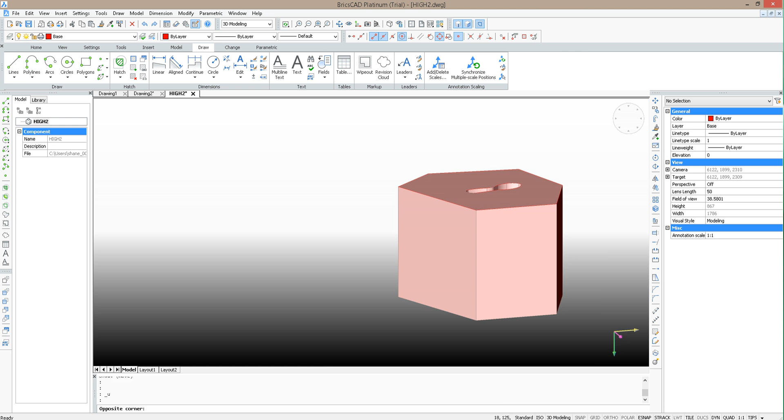Okay, so we're looking at this and wanted to make sure that it actually was covering our base. So see how it wasn't really covering it there?

So we just click the edge and we extrude it up. That didn't work, didn't like that.

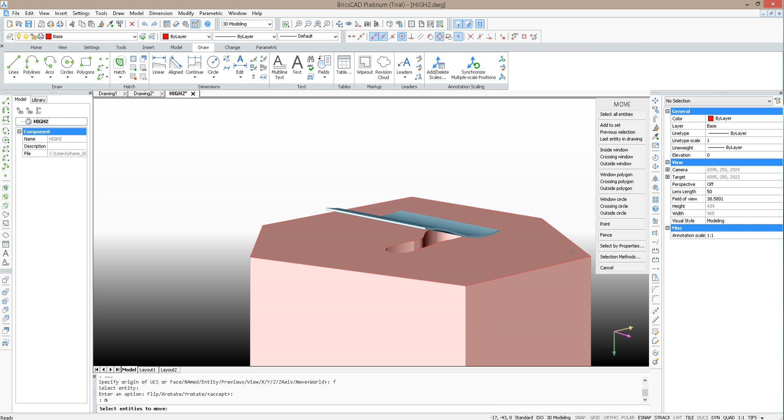UCS, F for face, and we select the edge. That's our working plane. Now when we move it, M for move, we'll move up. But see how it's moving all in random directions like that?

I'm going to turn ortho on. That snaps it, so it'll only move in the direction I want it to move, which is great.

So you see there was, that level there was the level that we actually originally drew our cookie cutter thing on. Cool. Alright, so I'm going to turn that on, everything's on.

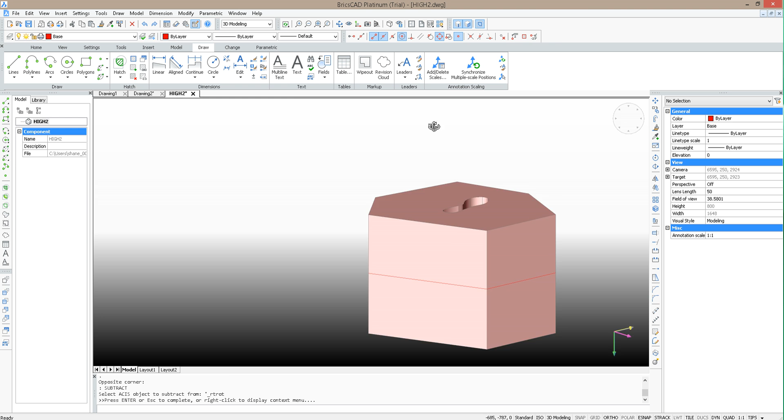So now we use the subtract command. Alright, so what do we want to subtract from? We want to subtract from that, we want to subtract this, and it's all done. Look at that. So we've now got our heel, which is great.

Okay, so it's a reasonably comfortable looking heel.

So now I'm going to turn the base off, and I'm going to turn the box back on. And, sorry, I didn't turn the base off because it was my working layer, so I'll make that my working plane, and I'll turn the base off.

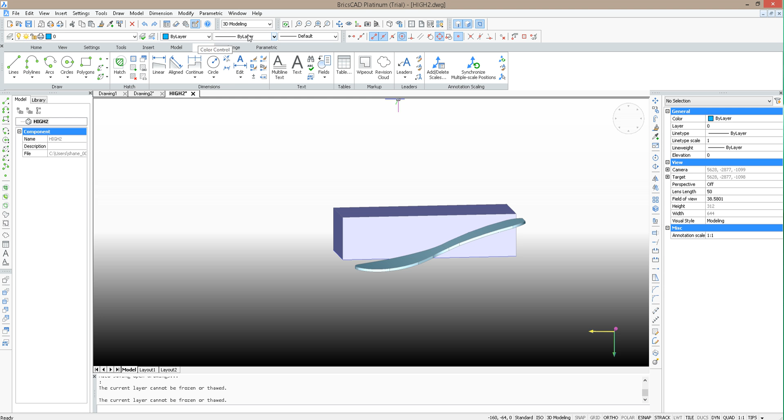Alright, so now I want to draw the actual stiletto part of the heel. I think that's what you call it. Sorry if I get that wrong. And so I need to select my working plane.

UCS, F for face, and I'm going to select the bottom of the box. That's my working plane. Cool.

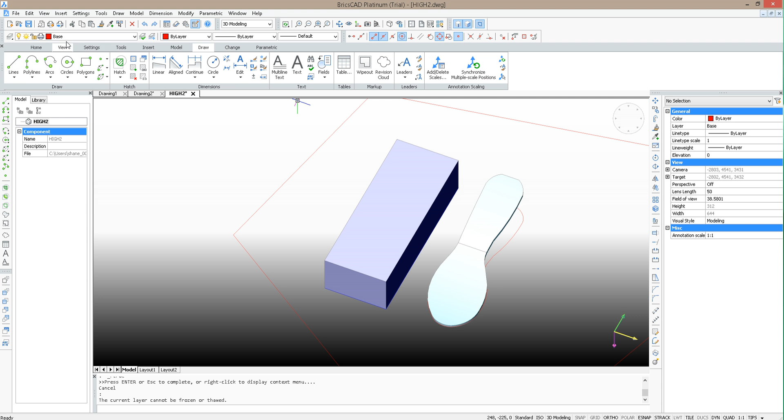Alright, now what I'm going to do is I'm going to turn the base back on. And I'm actually going to make the base my working layer, and I'm going to turn that off.

Okay, now we know that we want to actually draw our heel here on the bottom. So I click circle.

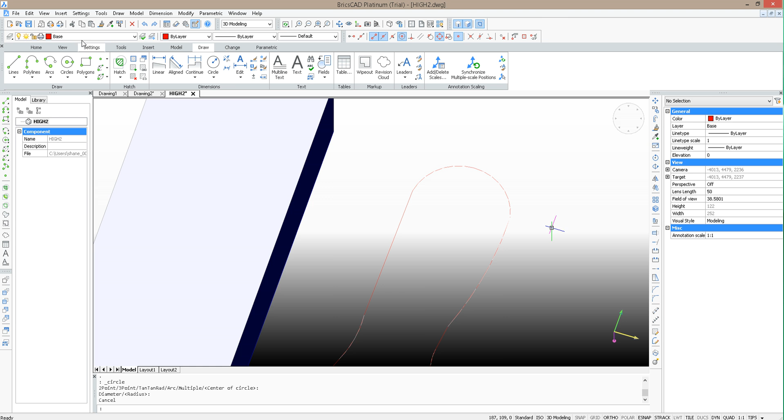Ah, it's white. That's why I can't see it. I'm going to go back to 2D drafting. Hopefully that will make my life a bit easier. Okay, I can see that a bit better now.

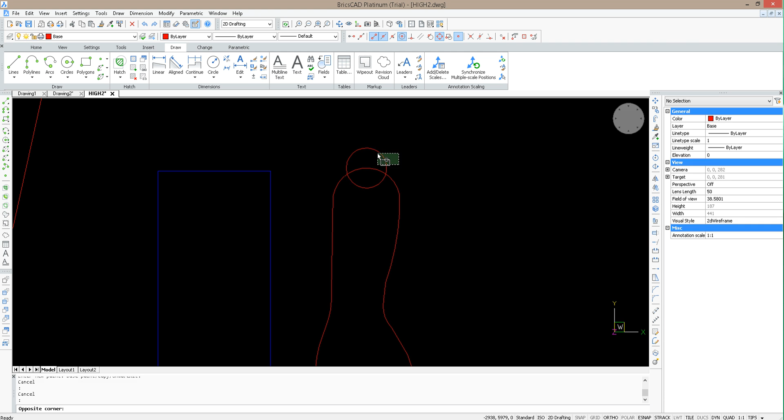Okay, now that's not really where we want it. We sort of want it on the bottom. So I'm going to click there, whoa, click there, and I'm going to move it. M for move. Snap it so that the end is there.

Alright, now how high did we make our heel? Does anyone remember? Yeah, well, we made it 5 centimeters high. So, sort of drawn that there.

We can extrude that. No, it's not wanting to give us the extrude options. So we can go back to 3D modeling, I guess.

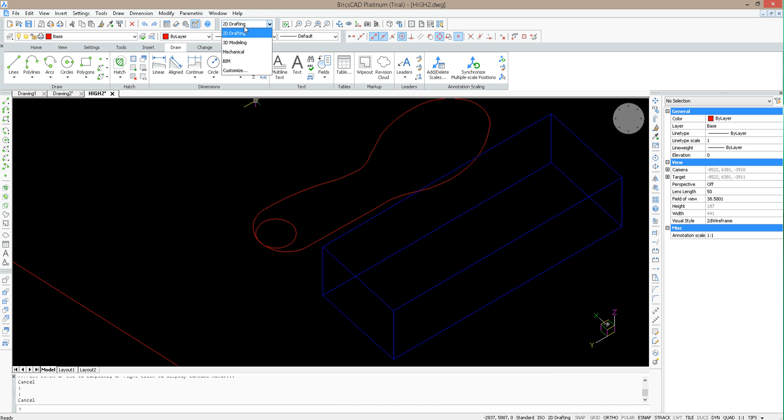Mine always comes up with that error. It's because of some other stuff I've been doing. So we want to make it 50, because that's how high we originally made it.

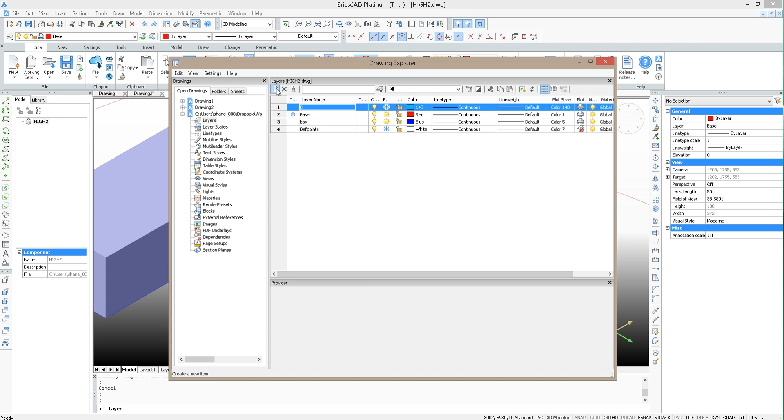And remember how last week we learned about editing faces? So what I'm going to do is, this guy here is on the same layer as base. I'm going to make a new layer, calling it heel, and I'm going to make that green.

Okay. I'm going to select that. I'm going to select this first. Put that on heel.

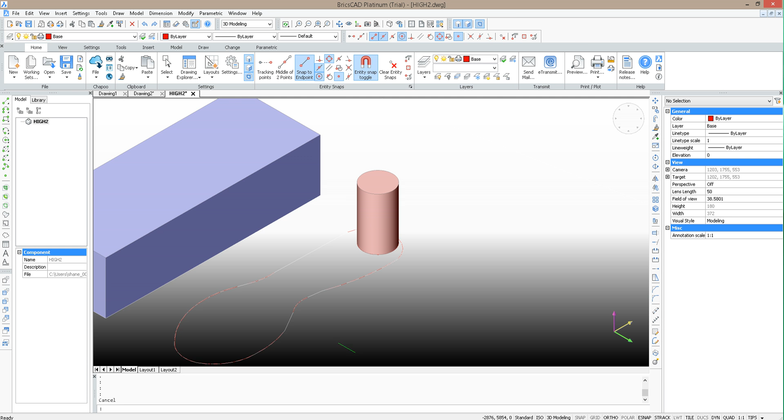It's being a bit difficult. Go back to 2D drafting. Hopefully that'll fix it. Sorry about that. Put that on.

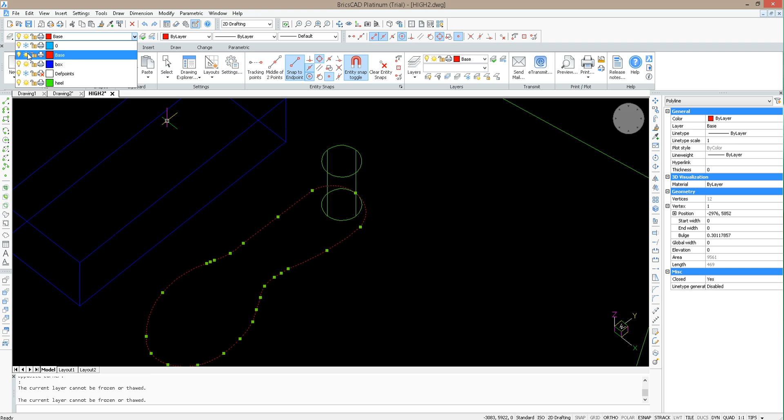Put that on heel and maybe turn that off. Heel, make it the working one, and turn base off. Okay, so now I've got that.

Okay, and we'll just change our view to modeling so we can actually see what we're doing. Alright, now there was a command called solid edit,

and we're going to edit the body, and no, it's not the body, it's the face, sorry, and we're going to taper it. So remember we did that the week before?

We're going to taper that face, and want to go from there down to there, and I think we said like 6 degrees was good, didn't we? Probably not enough.

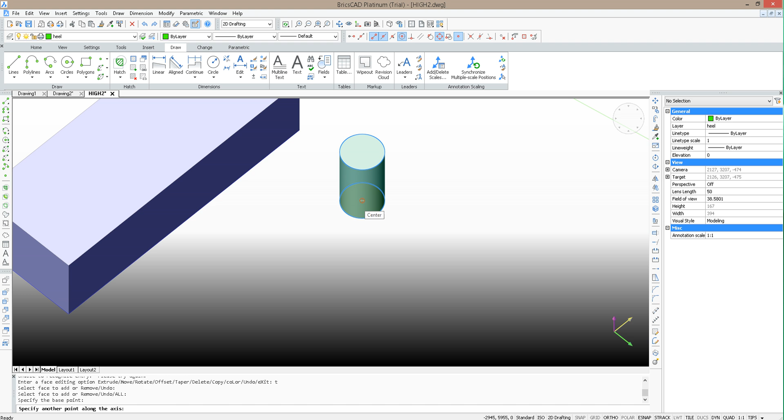So we'll try that again. F for face, T for taper. I tapped F. Select the face, that face, and there down to there, and I'm going to go 11.

There we go. Yeah, I'm pretty happy with that. I think it's in the right spot. I mean, maybe it's a bit ugly.

I'm not sure. Now what we're going to do is we're going to change the working plane to the top of that heel. So UCS, F for face, click the top.

And remember how we drew our thing last time? Well, this time we're going to use a polyline. And press F3 and turn ortho off. That way you can select where you're going to slice.

I reckon about there. It's like making a cookie cutter. You probably remember we did it last time.

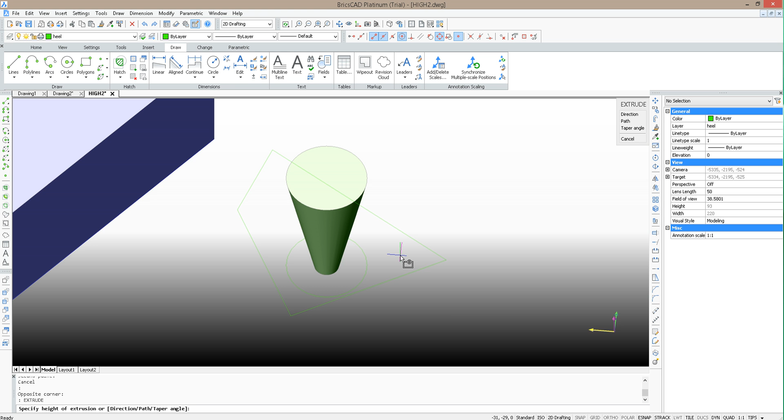Extrude that. Height of extrusion, let's go -300. Okay, so it's made a massive big thing that we don't really want.

Subtract. I want to subtract from that. I want to subtract that. Okay, now we have our heel that's going all the way down like we wanted it.

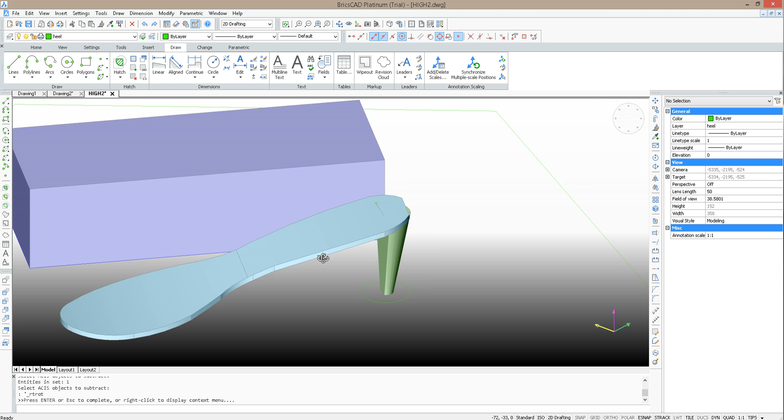Okay, so now what we're going to do is turn this guy back on. So now we've got that there like we wanted it, but there's a little bit of it jutting out here, and also sort of not really marrying up there very well. You can just hover over there, and we can go back to 3D modeling.

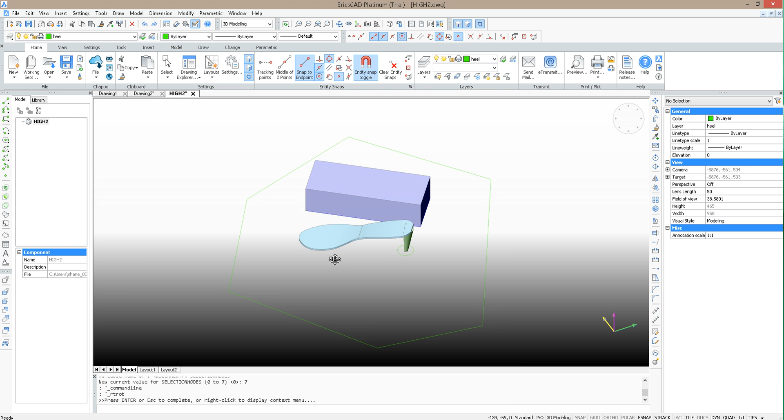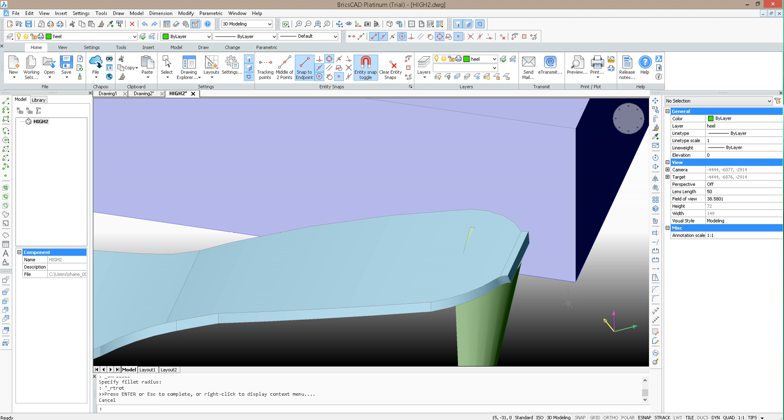It's a bit weird, isn't it? You do something like this. If you want, I don't know if that looks great. I actually don't like that very much. I'm going to Control Z that, and...

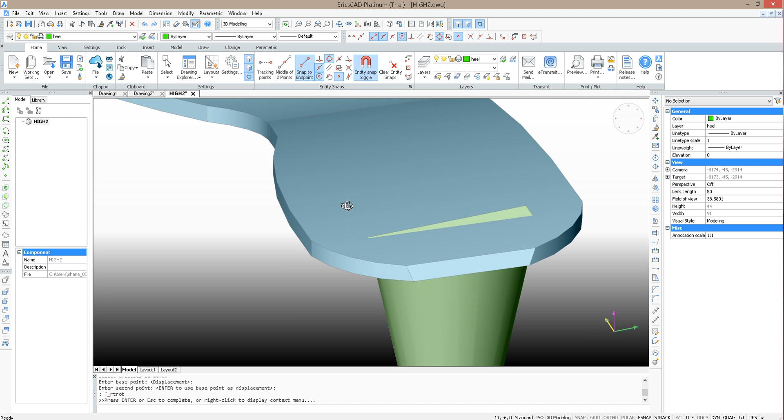Change my working plane to that again, and I'm actually going to move that. Okay, I moved it back a little bit. Okay, but still that doesn't look real good because it's sort of coming through.

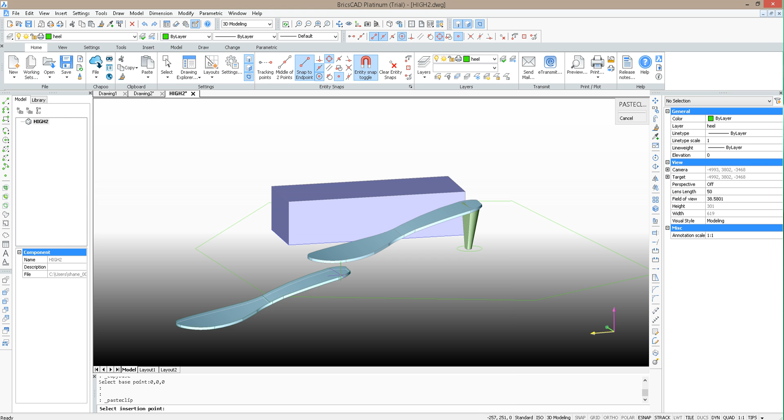So what you do is you select that, you use Shift Control C, and it says select base point. Type 0, 0, 0, and it selects your base point, and then go Control V, and now you're holding it, so it's going to paste it. So you go 0, 0, 0, and it copies it back in exactly the same spot.

Now the reason we're doing that is because we're actually going to subtract. We're going to use the subtract command. Okay?

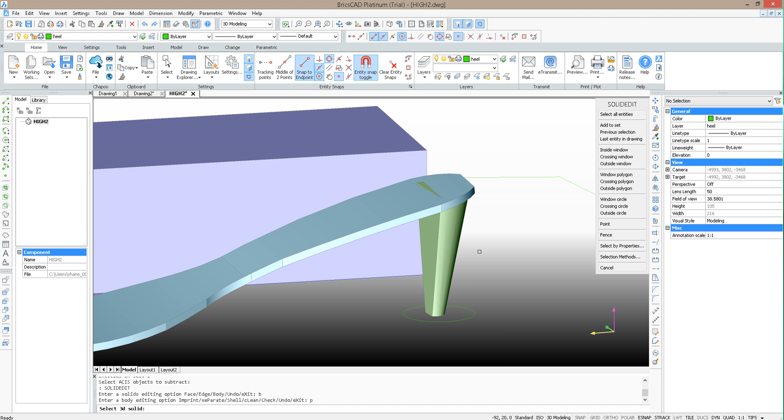So object to subtract from this one, object to subtract this one. Okay, so it actually deleted that first object, but now what's happened is it's actually made this into two separate things. So when we go solid edit and select the solid to edit, and we go B for body, and then we go P for separate, and we select this solid, and now it's separated these into two separate solids.

So when I click that, I can just delete that. You know what I mean? So now that's part of this. Okay? So now our heel is part of that.

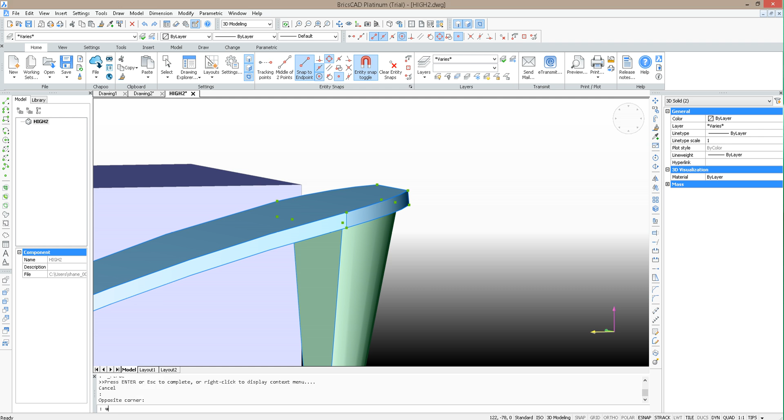Now we might want to do some stuff in there, like some chamfering and stuff. So what we do now is we select both of these, we type union. Okay? Now it's joined those into one thing now. Okay, which is kind of cool.

So now we can start putting our own artistic touch on this heel. So I can hover over to there and I can put, let's go 7, see what it does. There we go. It's giving me a nice arc in there.

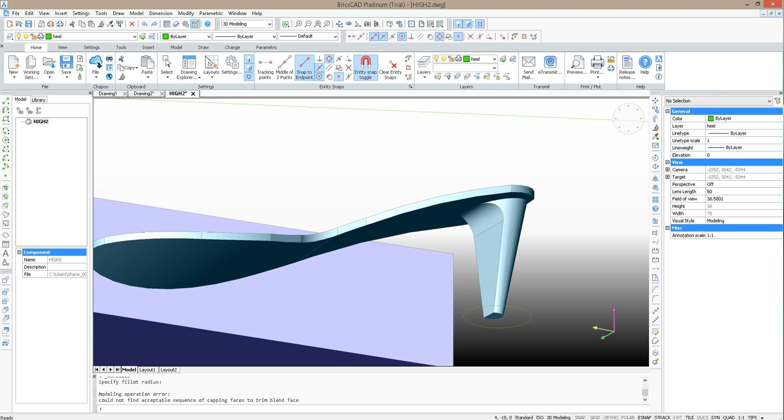Maybe I want something bigger than that. Let me go 14. Yep, it says that was too big. Let me go 10. That was also too big. Let me go 8. Alright, it doesn't mind that.

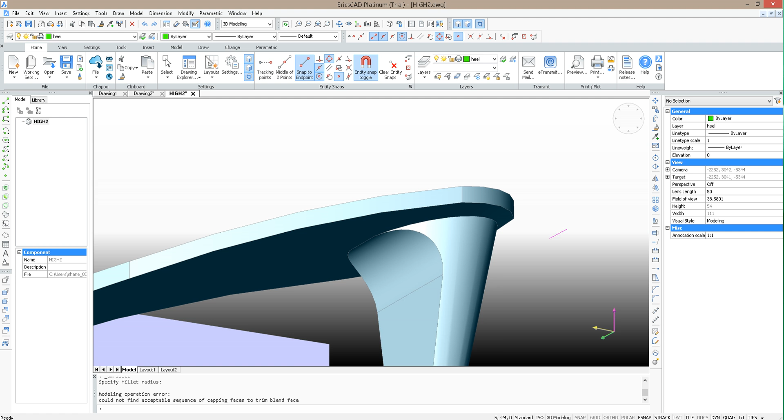So now it's given me a nice fillet there, and I can do another fillet in there as well. So I select that guy there, and I can do like 3 maybe. Didn't like that.

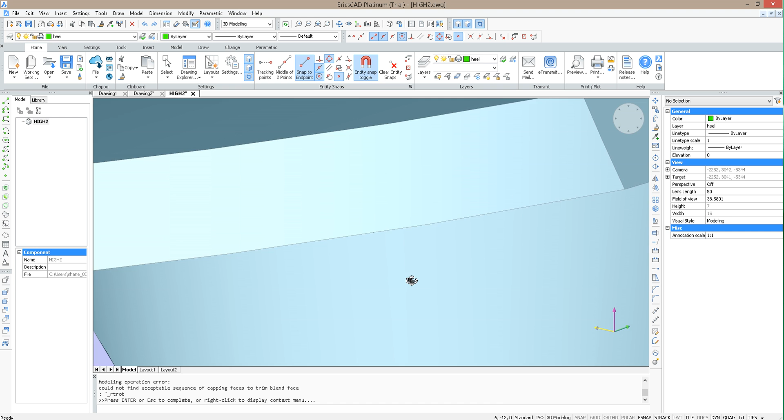Ah, that's why. Because of that there. So it doesn't want to let me fillet that at all because of that. Which I guess is okay. Because you see how it's intersecting directly with that, so it won't let me do the fillet there.

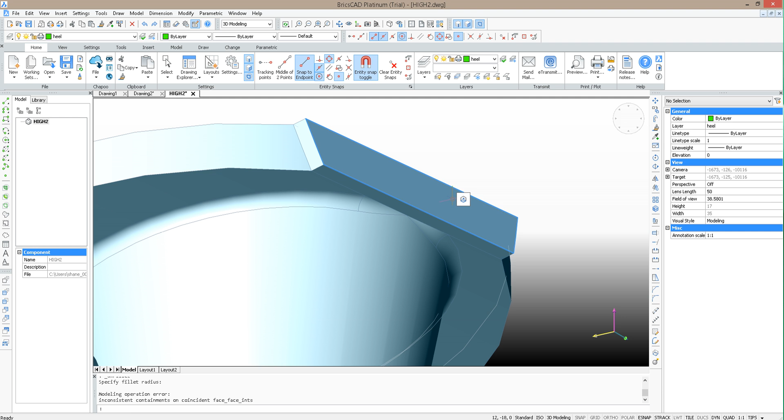So if I pulled that out, say 1 mil, oh, that looks a bit weird, then it will let me fillet. Go 1. See what I mean? Okay, and then I can push that back in. Okay, now it's done it.

So now we've got our heel, okay, and we've sort of put some cool finishes on it. I mean, there's other things we can do. We can select these guys here and we can chamfer that, say with a 2 mil.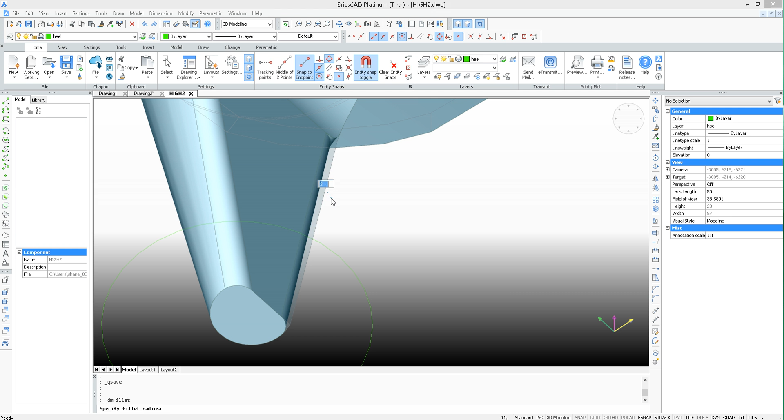And just save my work. Chamfer that. Put 2 mil there. Yeah. Like that.

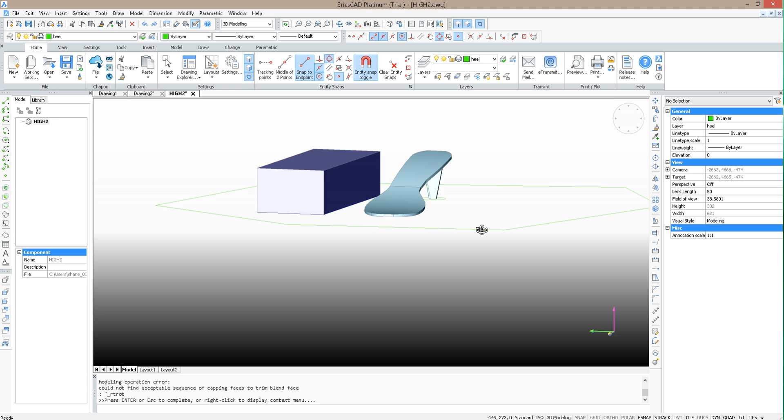We've got to play with that some more. But now we sort of have our basic structure of our heel, you know. So now what do we have to do? Well, we have our little section here to do.

So we're just going to do that quickly. And we can play with that in Meshmixer once we get to that point.

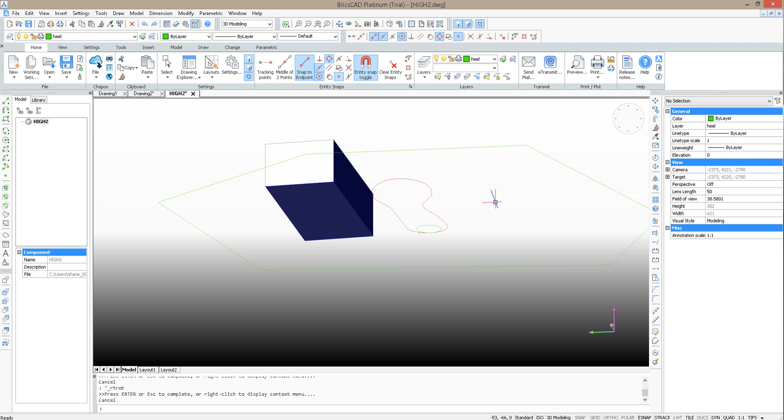So we can turn that off if we want, and we can turn our base back on, and we can change our working plane back to this one. Okay, so that's our working plane again. I'm getting sick of this external box here, so I'm going to get rid of that.

So whereabouts do we want our thing to be? The thing where our foot goes through on the heel. Now I think a good place for it would actually be around about here.

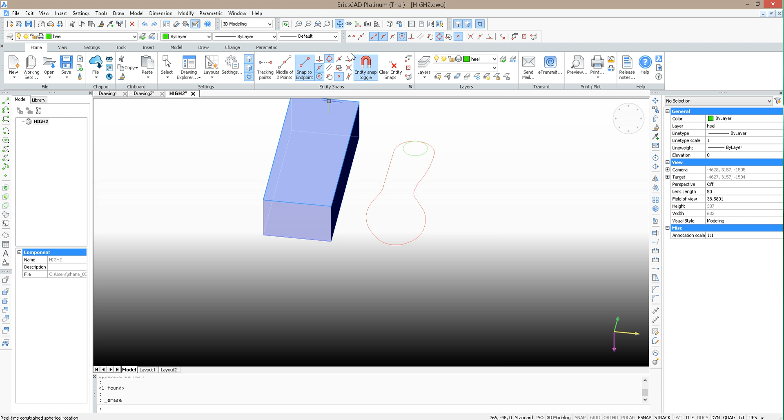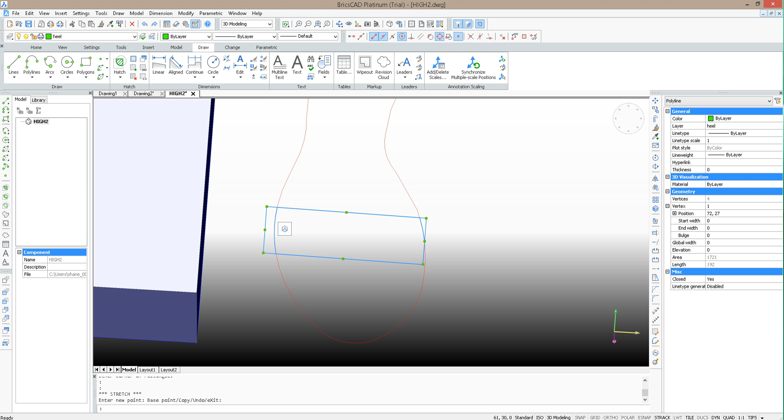So I'm going to draw a polygon. And I'm going to turn off the snap function. So that's probably an okay spot for it. Now, probably want it like that, and probably like that.

That's pretty good, and we probably want it to match what we're doing. So I'm going to change this and put it on the base layer, and change everything to base.

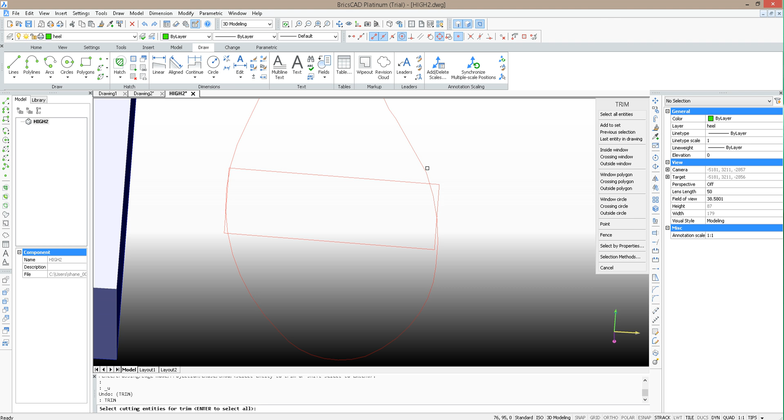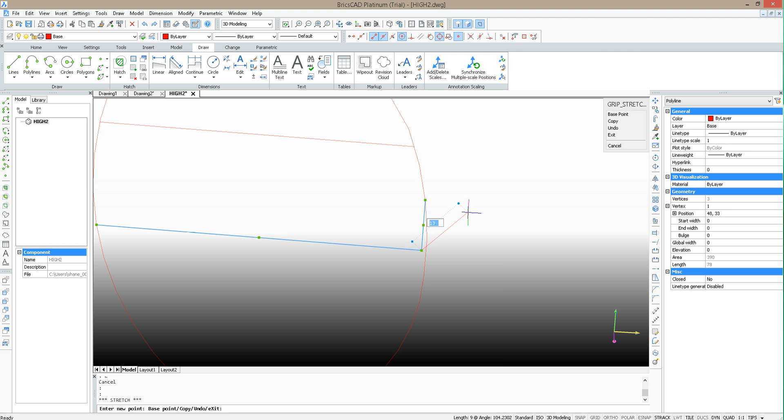Now we're going to cheat a little bit and use the trim command. Let's trim that away, and trim that away, and trim that away. So we just delete that guy, and maybe this guy here. I'm just going to explode that whole thing.

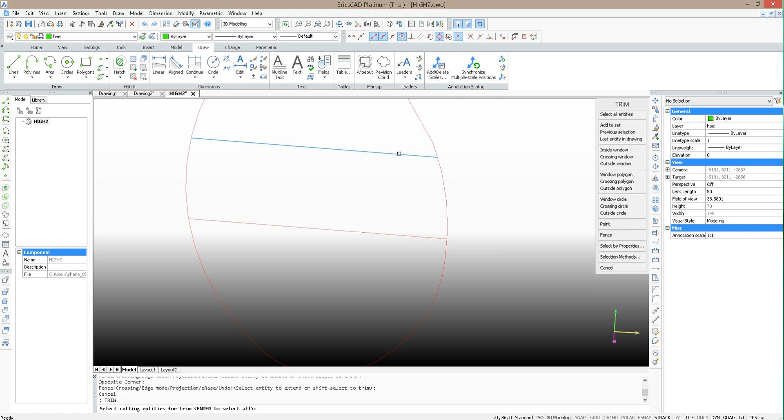Okay, get rid of that. Use the extend command, click that and click that. Now I'm going to use the trim command again. I'm going to click that and that, press enter, and trim this so that it's now the shape that we want. I'm going to select the whole thing and join it.

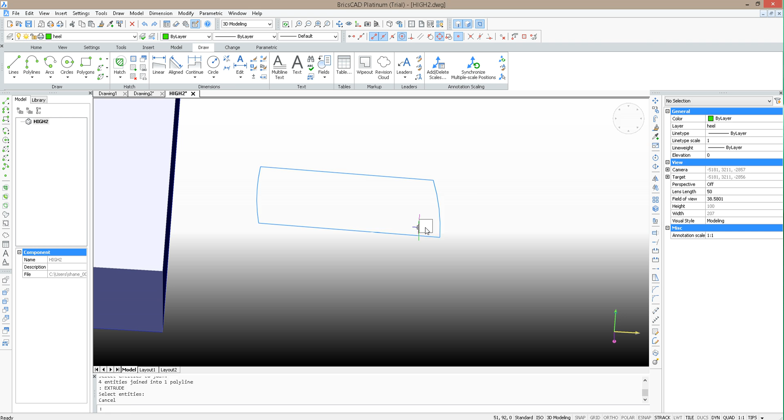Now we probably want to extrude that. Just hover over it, let's bring it up. Let's say 35. Okay, so we've got that there.

Now we can turn this back on. So now we've got like a weird thing that's sitting in our shoe, and you're not sure if we like it. I don't really like it very much. So we can have a look at it and say, oh, is that a good place for the strap or not? I think it's alright.

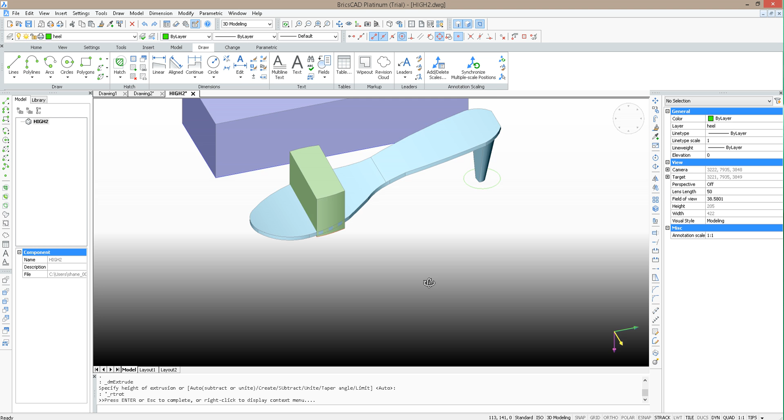Maybe back a little bit, but that's something you guys can play with if you want. And I think it's probably a little bit high. I'm going to bring it down 5 mil. Okay, and then we can put some stuff on it.

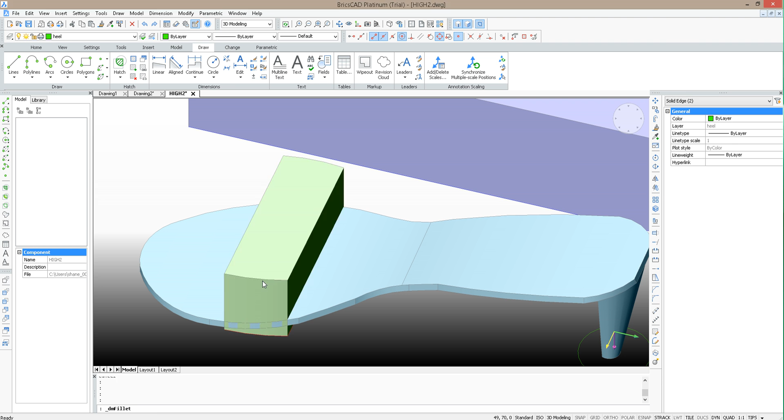So I would click both sides, click that one, and then do the fillet. And see how it's doing both at the same time? I think that looks alright. What do you think? I think so.

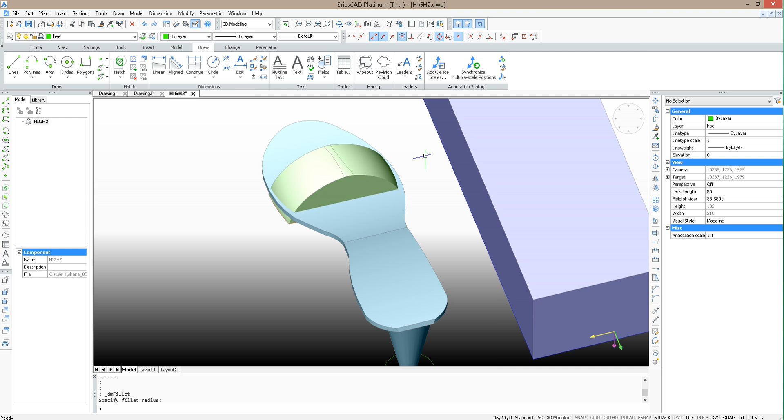Okay, so now we look at that and we think, oh, okay, well that probably needs a little bit of something. That's alright, let's fix that. Now we've got this funny little bit jutting out the bottom. Now we do the same thing that we did last time to sort that out.

So we go Shift Control C. Oh no, select that first. Sorry, first select it. Shift Control C, 0, 0, 0. Enter. And then Control V, and we go 0, 0, 0. And it puts it in the same spot.

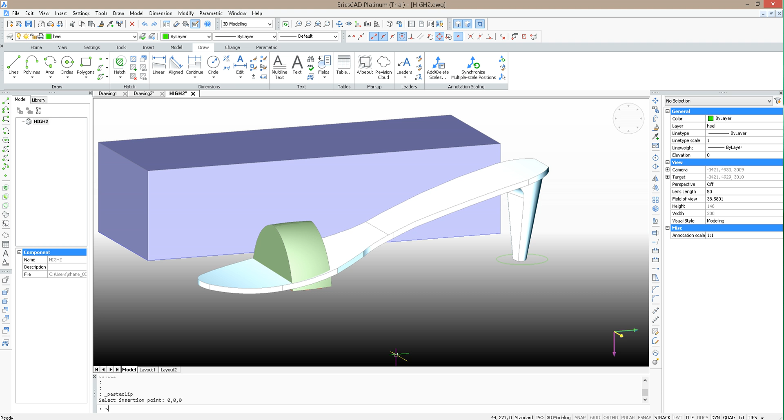And we go subtract. Object to subtract from is that. Object to... no, that's not right. Object to subtract from is that, object to subtract is that. Cool, so that's done it.

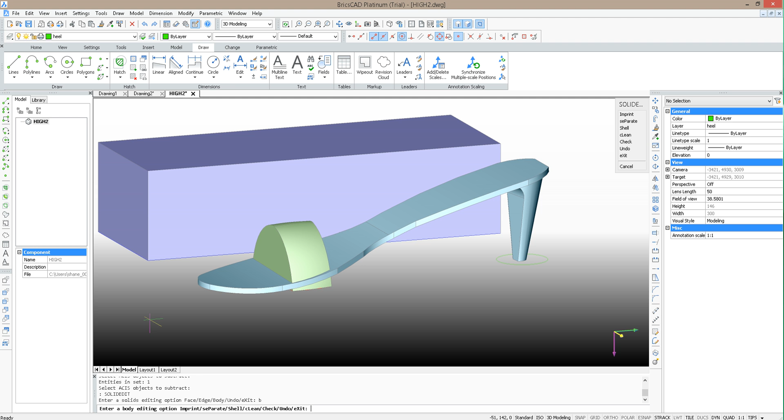Now we go solid edit, B for body, P for separate, and we click this guy. So now that is gone because it was a separate object. Okay, that's cool, so now we have that, but it hasn't got a hole in it. So we need to put a hole in it so that we can actually put our foot through.

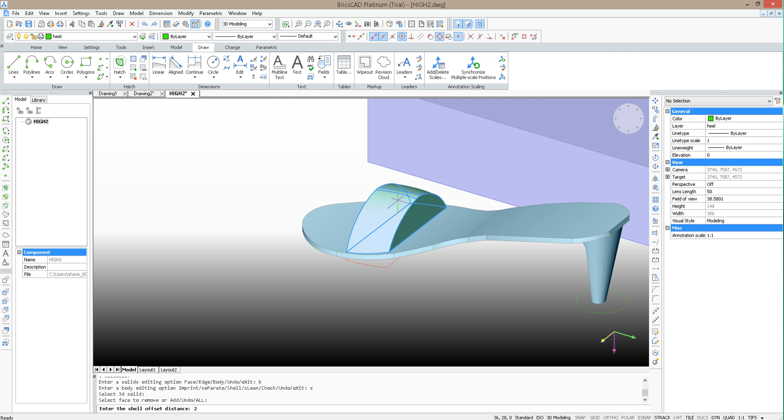Okay, we're nearly there now. So we go solid edit, B for body, S for shell, and we select that, and it says the shell, let's say 2 millimeters should be enough. Okay, you think, well, what did that do? It didn't do anything. Well, it did - we pushed that back 2 millimeters. Whoops.

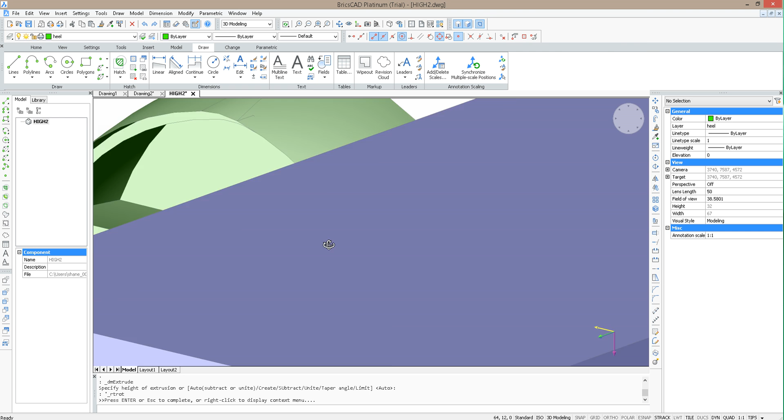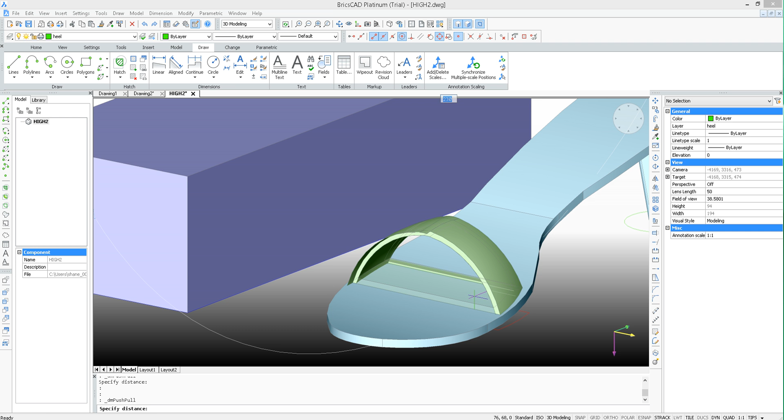Look at that. Now we have the better part of a heel done. Now there's some stuff which looks a bit funny on it, and we might need to resolve those things in Meshmixer.

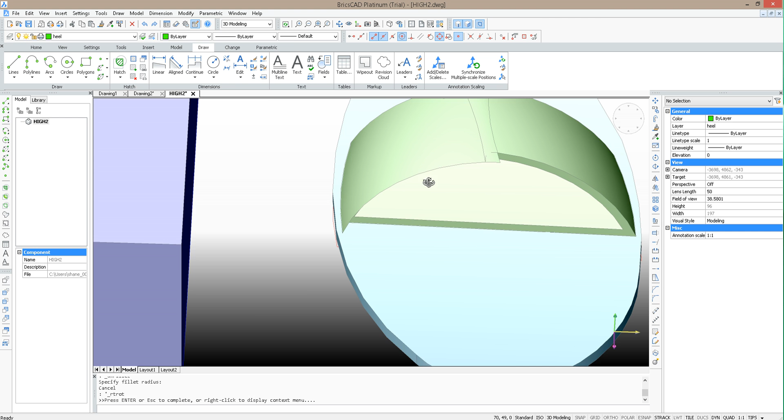Which is fine. So we're going to save that, and we're actually going to do a union on that. So select the whole thing, union, okay.

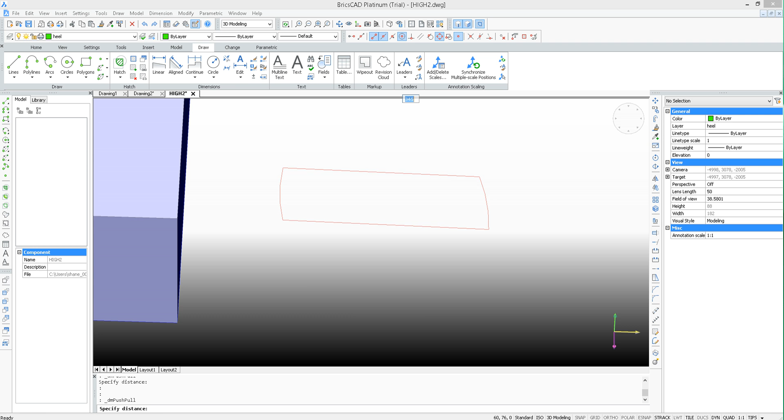Okay, probably push that down. Okay, we've got our heel. There's a few different ways to do it, but I think it's looking alright. Okay, that's looking a bit messed up there, but we can definitely fix that in Meshmixer.

So I'm just going to select that and go STL out. Yes, and I'm going to call it high 2. That's alright, we call it high 2.

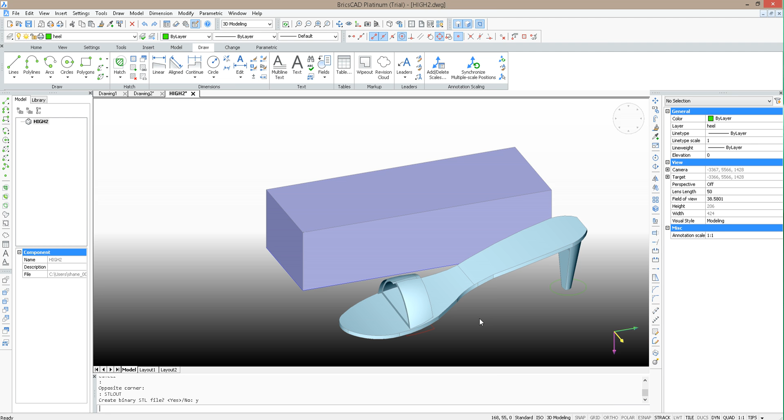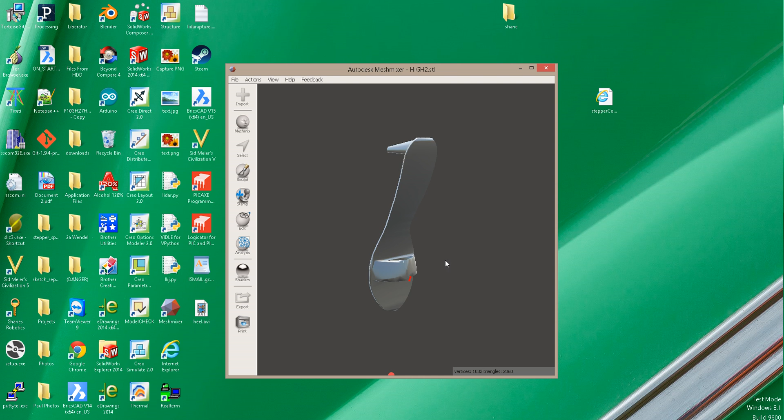Alright, now we're going to open up Meshmixer. Open, and it's not a mix file - I'm going to import custom projects, high heel, high 2. Okay, so a fair few of you guys played with this one. If you press left click it lets you actually move around. Sort of drag something and move it around, and now you've got this in here.

So the first thing you need to do is solidify it. I'm going to see if I can remember how to do that.